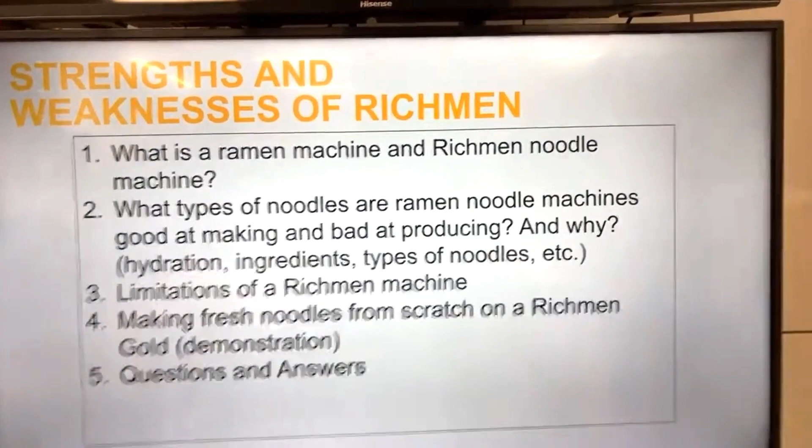So let's get started. First of all, I want to talk about what a ramen machine is, and then what a Richmen noodle machine is. For those people who don't know what they are, it's gonna be difficult to understand, so I want to address this question first. And secondly, what types of noodles ramen noodle machines are good at making and bad at producing, and why. We're going to talk about hydration, ingredients, types of noodle, etc.

And I want to address the limitations of a Richmen machine. There are certain things that Richmen machines are not good at doing, so I want to talk about that. Anyway, we're gonna go into the demonstration of the Richmen Gold machine, and Megumi is gonna make some fresh noodles from scratch.

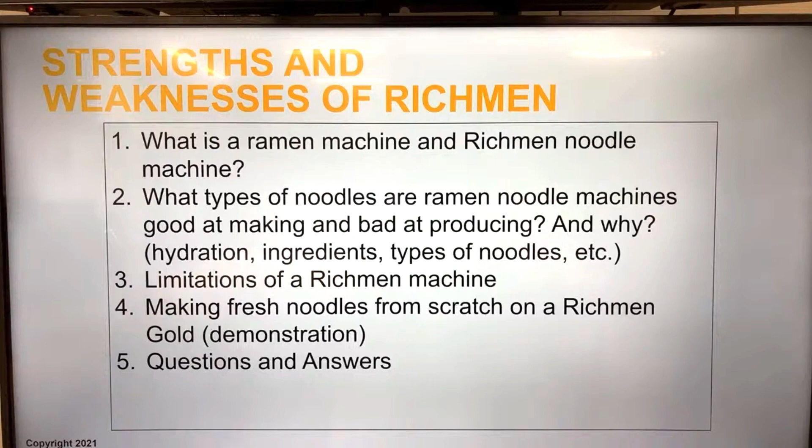What are ramen noodle machines for restaurants? What is a Richmen machine? There are many noodle machines out there, including noodle machines on a bigger scale. For example, some noodle machines produce tens of thousands of portions of noodles in an hour or so for chains of restaurants, for retail like supermarkets, and for instant noodles. These are really big large production machines. But in this class, we're just gonna focus on the Richmen machine, which is designed for restaurants and small production.

So first of all, usually ramen noodle machines for restaurants and small production are capable of producing a variety of fresh noodles that are low in hydration. Low in hydration means 25% to 40% to the weight of flour. So 25% hydration means for 1 kilogram of solid ingredients, which is usually flour, 250 grams of water or liquid is mixed into it.

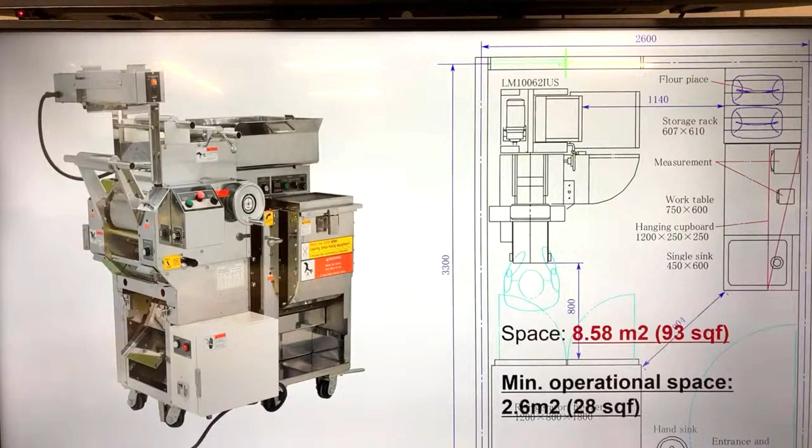So then that's not precise, right? But if both sides are 1 millimeter all the time, that's what precision is, and the Richmen machine delivers that. And space savings: the Richmen Type One machine, for example, is designed to save space. It doesn't take much space. For example, in this layout plan, it only takes up 2.6 square meters of operational space. So it's designed to fit into the small kitchen of a restaurant.

So for you to understand what each of the processes is, let's just go through each process briefly. In the mixing process, we mix liquid ingredients, that's water and concentrate and other liquid ingredients, like raw eggs, for example, and solid ingredients, right? Solid ingredients being wheat flour, other types of flours, for gluten-free types maybe rice flours. So solid ingredients and liquid ingredients are mixed together in the mixer, right?

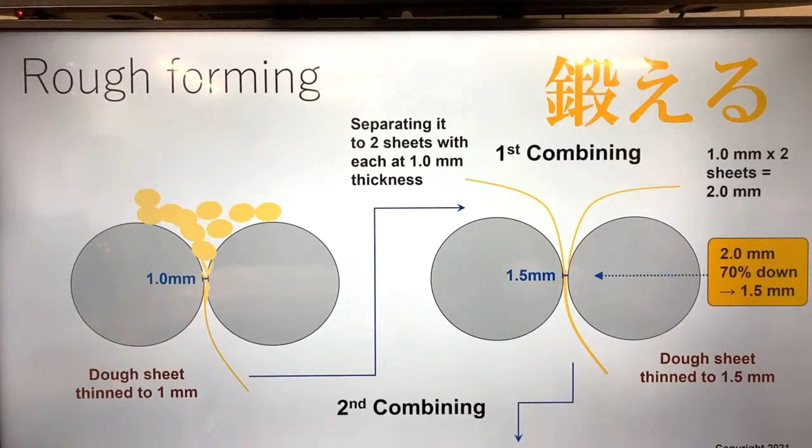We want to make it stronger, and to do that we need to separate this single sheet into two separate sheets, right? And then compound them through the roller. We call this process first combining, right? And then we repeat this process one more time. We call it second combining.

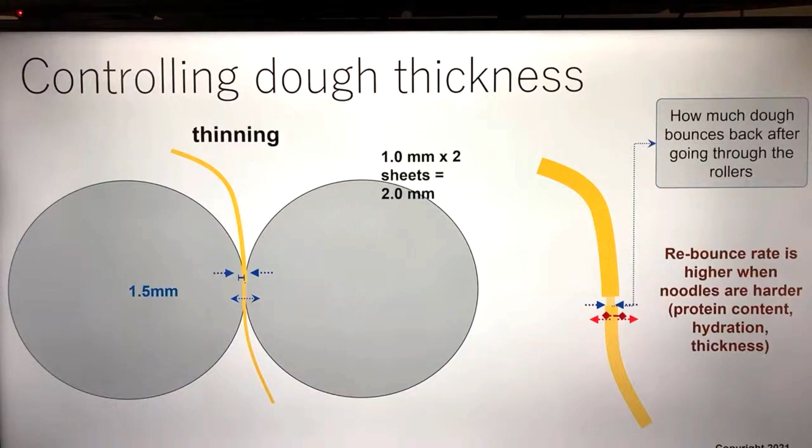After that, the gluten structure of the dough is complete at that point, so all we do is thin it to the final thickness. We gradually thin it to keep the gluten structure inside the dough intact, without damaging it. So we gradually thin it, and then we finally cut it into noodles, right? Using this kind of cutter, we call it a slitter cutter.

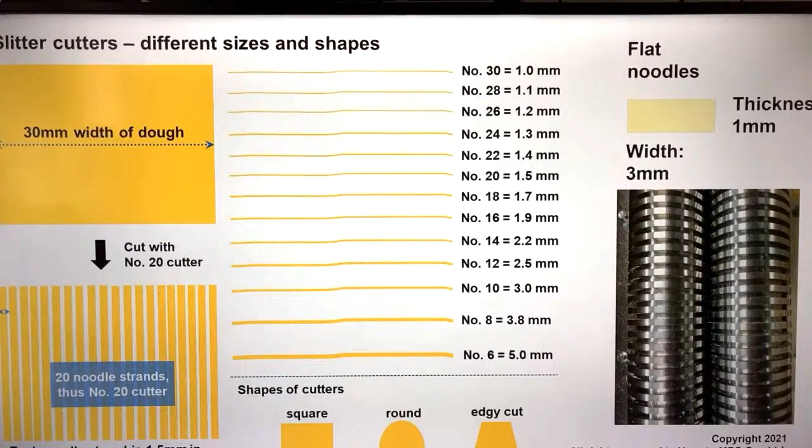And so the thickness of the dough, the thickness of the noodles, is determined by the thinning rollers, the roller gap. But the width of the noodles is fixed by the cutter size that we use. Ramen noodle machines or Richmen machines usually use this kind of slitter cutter, and they come in different sizes and different shapes like square, round, edgy, depending on the kind of texture you're looking for and the kind of noodles you're trying to make.

So we can make them square, like rectangle, using the square cutter. And we can make them round, for example, for pasta, spaghetti-type noodles.

And we can make it edgy to have a sharper surface, to have a certain texture, and reverse cut for noodles like ramen noodles. We actually did a class previously on this type of ramen noodles, and we can make them curly, right? Some people like curly noodles, and we can even control how curly we make the noodles.

So we use elastic silicone plates, and we put them in the back of the cutter, and the noodles coming out get stuck between these plates, and they get squeezed out eventually, and in the process they get curly.

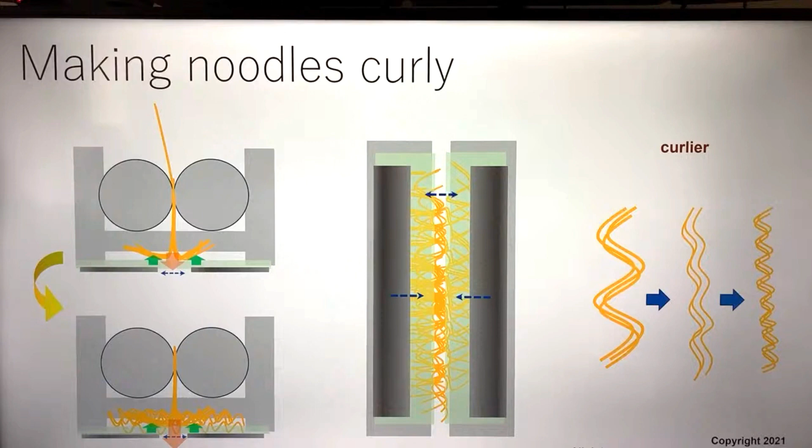And so we can make basically any kind of noodles with the Richmen machine and the ramen machine. But we need to think about these variables, which we already talked about in the previous classes. These variables determine the noodle texture, which is actually the deliciousness of noodles: protein content of flour, and the viscosity, which means how elastic the noodle is, you could say chewiness, and then hydration.

Less hydration ratio is harder, more hydration is softer, and of course noodle size. The smaller, the less bite, which means it's softer, and the bigger the size, the more bite, harder. And how it's served: if noodles are served cold, the noodle texture gets tighter, on the harder side. If it's served hot or warm, the noodle texture tends to be softer.

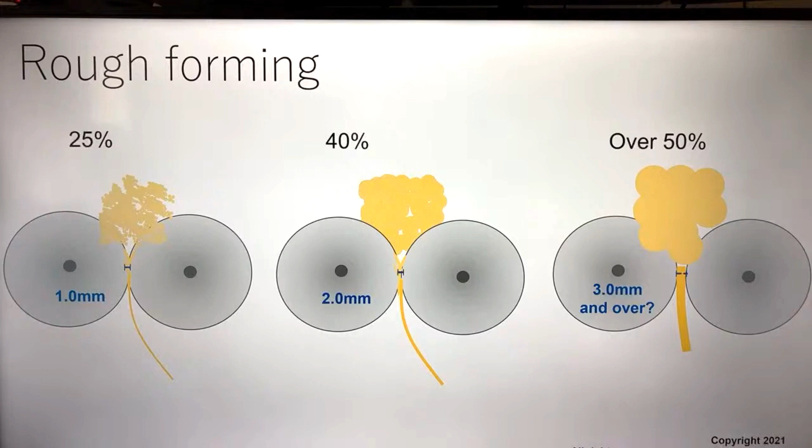And Hakata tonkotsu noodles, at 25% hydration ratio, usually have a thickness of 0.9 to 1.1, and the width is typically 1.1 to 1.3 millimeters, so that's really thin. And the hydration ratio is 25, maybe 28%. So it's very low, so it's a hard noodle and a thin noodle.

And shoyu and shio ramen, the typical standard ramen noodles, usually have a thickness of 1.3 and width of 1.5, and the hydration ratio is usually 30% to 33 or 34. And dipping noodles typically have a thickness of 2.1, width of 2.5, and hydration of 40%. So they're relatively soft noodles.

So when we're talking about udon noodles, there are many types of udon noodles, and here I'm talking about Sanuki udon noodles. We did a class on Sanuki udon noodles previously, so for more information, please check our previous class on my YouTube channel.

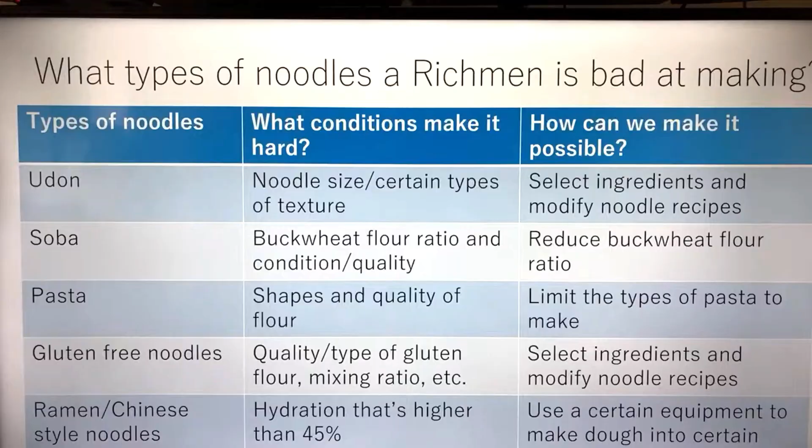So if we want to make good udon noodles with a good texture on a Richmen machine, there are certain conditions. We can make udon noodles at a lower hydration ratio, and we can limit the noodle size to a small size, which corresponds to a lower hydration ratio. Again, the less the hydration ratio, the smaller the noodle size we should make, to balance the noodle texture.

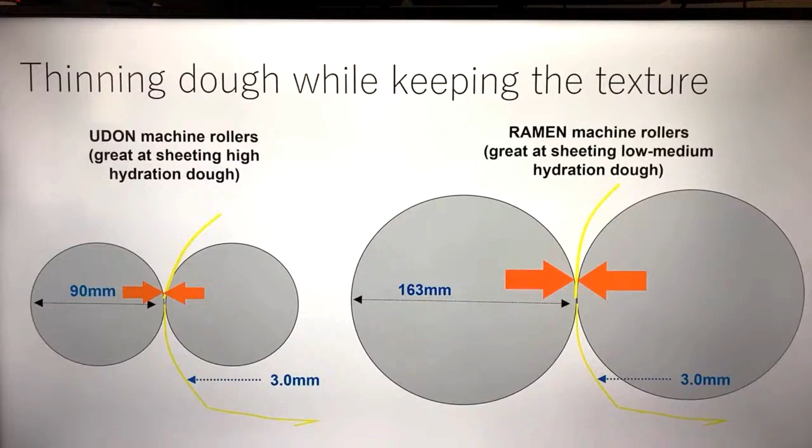So that's why it's difficult for udon machines to be able to process noodles such as Hakata tonkotsu noodles, thin 25% hydration ratio noodles, because it doesn't give it enough pressure. So again, when we're talking about udon noodles, we should limit the noodle size and the corresponding hydration ratio.

And the type of pasta that Richmen machines are good at making would be any strand-shaped pasta, like spaghetti, fettuccine, linguine, pappardelle, that kind of wide strand-type pasta, and certain types of sheet-shaped pasta, like lasagna, which is very easy for Richmen machines to make.

And some people are looking for making filled pasta like ravioli or tortellini. Well, of course the Richmen machine can make the sheet, just the skin of them, because the Richmen machine can make gyoza skin, dumpling skins, wonton skin. So it's possible. It's just a matter of what ingredients you use.

It's possible, but some of the Italian pasta machines out there are capable of doing the wrapping of them as well. That's the function that the Richmen machine lacks, right? So if you're looking to make only this type of pasta, like ravioli, tortellini, or other types of pasta, then you have a better choice, an alternative, than the Richmen machine.

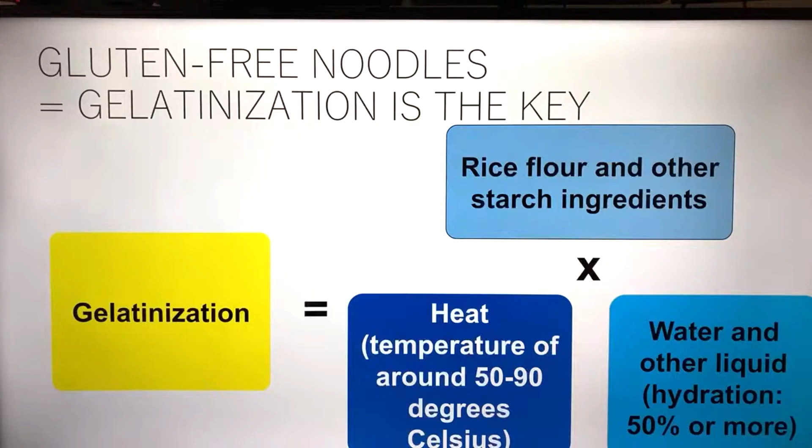And soba noodles could be gluten-free if we're doing a 100% buckwheat flour mix, because buckwheat doesn't have any gluten, right? So there's some difficulty in the production process; making them is kind of cumbersome.

So that's how you can make soba noodles, which are actually pretty good, even if buckwheat is 50% and the wheat flour 50%, right? 50-50. The kind of soba noodles we can make with Richmen machines are actually very good, but they're not gluten free, right? So again, if your main business is soba noodles, and if you want to make soba noodles that are gluten free, then the Richmen machine may not be for you.

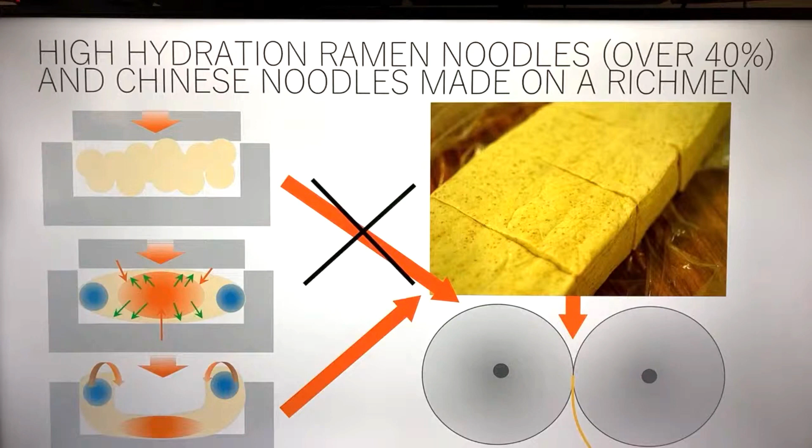So we use this kind of press machine that's used in the udon machine, and we basically press this crumbly dough into a chunk of dough, and then we go through this process of folding it and pressing it, folding and pressing it, to develop the gluten structure inside the dough. So the dough becomes like this, lower in the picture, kind of blocks, right? If we can make them into a block shape like this, it'll be possible for us to further process it into single sheet dough, and then the rest of the process is the same as we talked about in the beginning of this lecture.

Okay, and I want to talk about other limitations that Richmen machines have. So, types of noodles they can make, right? We talked about them, and what I want to say at this point is that we want to ask ourselves what kind of business is our main business, right? Is it ramen noodles, or soba noodles, or gluten free, right? Like, oh, I'm gonna specialize in serving gluten free noodles. Then the Richmen machine may not be for you.

Of course, we're still working hard to find ways to engineer ways to produce better gluten-free noodles with more efficiency. But first of all, they are not initially designed to produce gluten-free noodles. So if your main business is gluten-free noodles, then they may not be for you.

So, automated production process. We get asked this question a lot. Are the Richmen machines automatic, are all the processes automatic? No, they're not. As you can see later in the demo, some of the process is manual. For example, we had to feed the dough into the roller in the first rough forming process, and we move the dough around, roll up the dough from point A to point B, and help the dough sheet feed into the roller and so on.

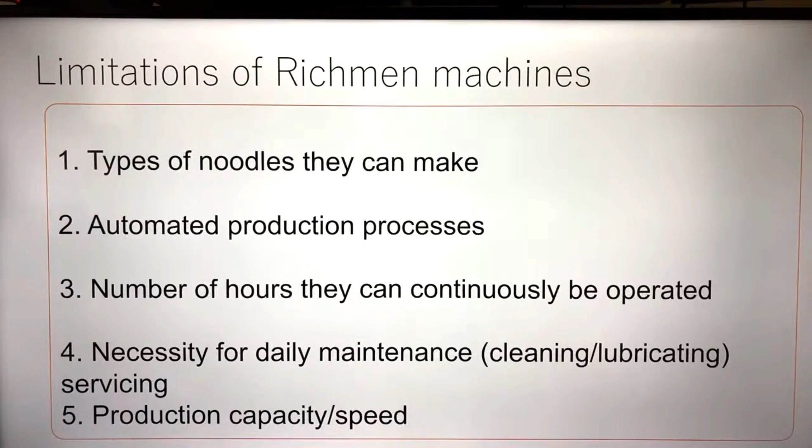And lastly, production capacity and speed. We have bigger options, but I'm just going to talk about these four options and Richmen One. Production speed is up to 100 servings an hour, equivalent to 12.5 to 13 kilograms of fresh noodles. Again, we want to limit the daily continuous operation time to 6 to 8 hours, so we usually say you can make 500 servings a day. Option B is Richmen Gold, which is a bit faster: up to a maximum of 150 servings an hour, so we say 700 a day max.

Pattern C is Richmen 2 with a separate 25 kilogram mixer, and the noodle machine Richmen 2 can pump out almost double the amount of Richmen 1, so we say a thousand a day. Pattern D is the 25 kilogram mixer and 2 units of Richmen 2, and that's 2,000 a day. And of course we have bigger options, but again, Richmen machines are designed for restaurants and small production.

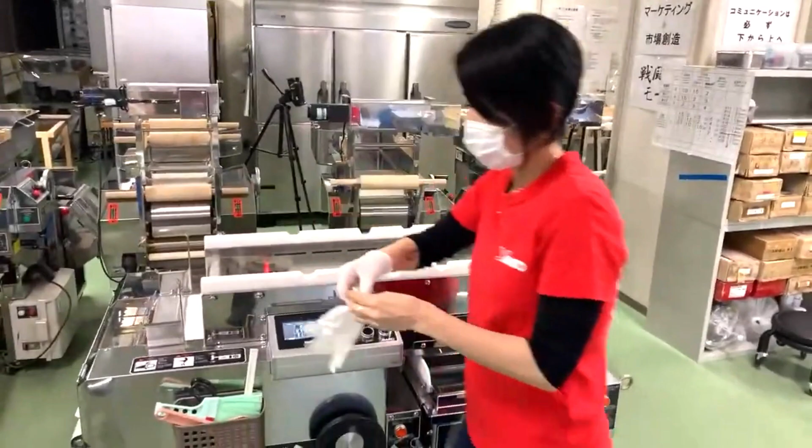So this is a Richmen Gold machine, and it's a fairly new machine that we started shipping a few years ago, like 2 to 3 years ago. It has the 10 kilogram mixer, and it has a lot of functions that we don't see on Richmen 1 or Richmen 2 machines. But it's basically a Richmen machine.

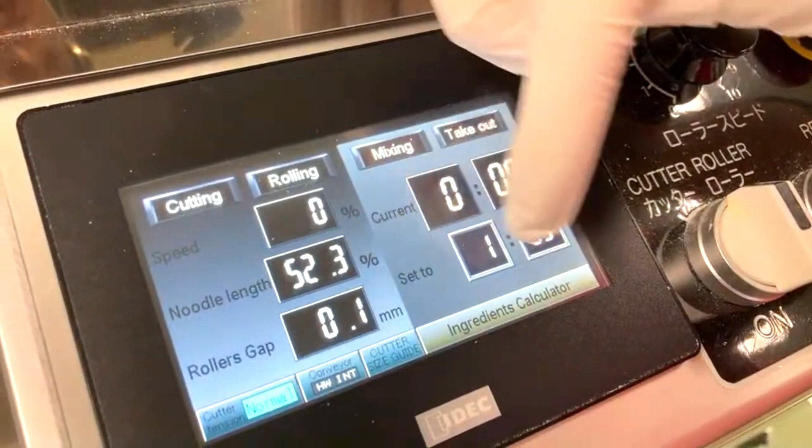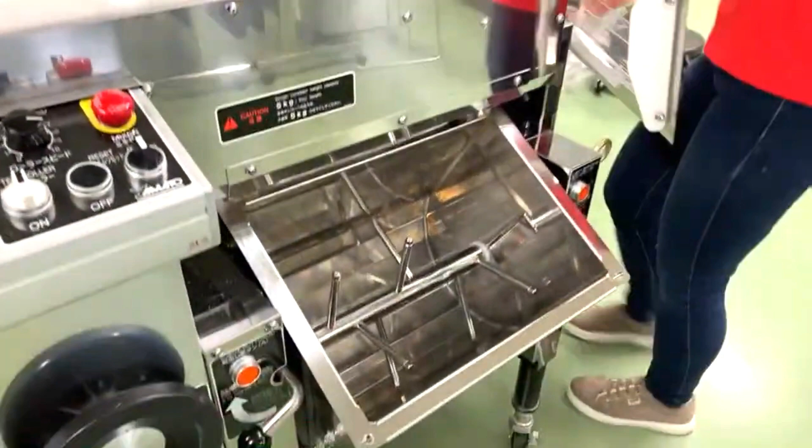We wanted to show you the types of noodles this machine is not designed to make. So today we are making udon noodles on the Richmen machine. You set the timer for the mixer here on the touch panel, and again this is a 10 kilogram mixer, so you can put up to 10 kilograms of flour, but the minimum batch is 4 kilograms of flour.

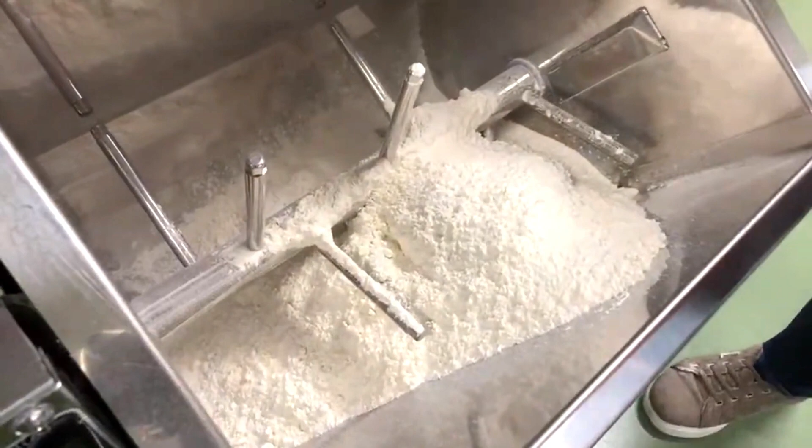What she's making now is salt water. Udon noodles use a lot of salt, right? And if you want to know more about how to make authentic udon noodles, you can watch our previous class on udon noodles. Because we use a lot of salt, some of the salt doesn't melt with one round of stirring.

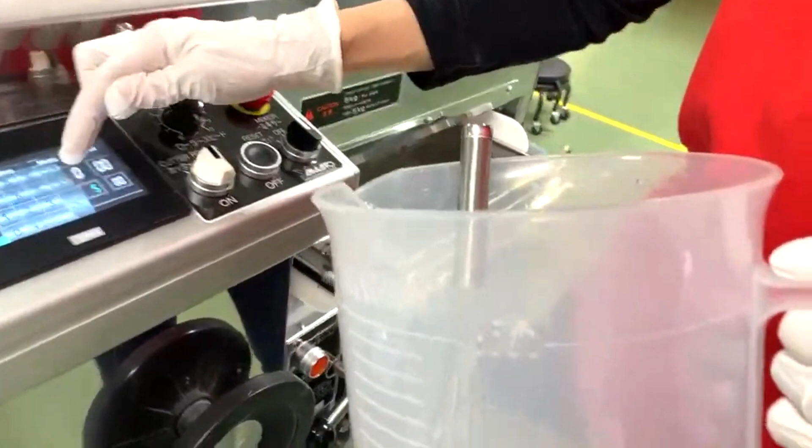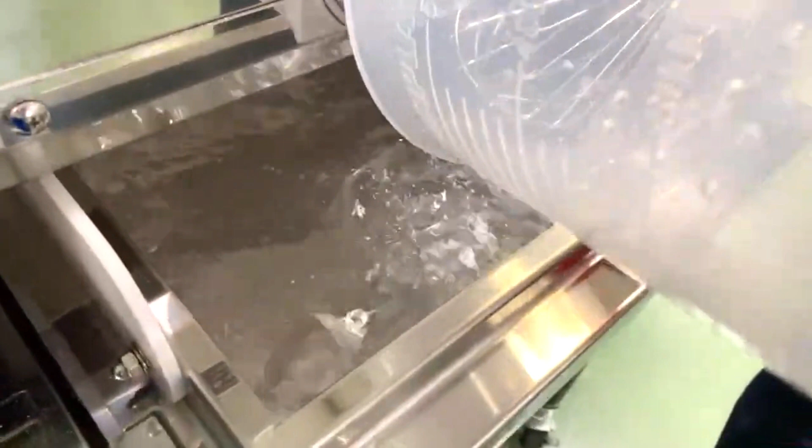So we want to pour the water back and forth between bowls. Another thing she's putting in is vinegar; you can use rice vinegar or a type of grain vinegar as well. Because this is a high hydration ratio noodle, we are trying to go to the limit of this machine. This is 42%, which is a bit beyond the higher range of hydration ratio for this machine.

But depending on the type of flour we use and maybe the temperature of the water, we could go up to 45%. So the temperature of the water matters, and the protein content of the flour matters for how easy it is to process on the rough forming process. Remember, you are trying to make a single sheet of dough from this dough, right? That's what gets tricky and makes this noodle making process difficult.

So again, the larger the chunks of dough, the harder it is. It's more cumbersome, because it's softer and it gets stickier, and it's bigger, so it's hard to feed them into the set of rollers and turn it into a single sheet of dough.

And this mixer is rotating the mixer blades at 75 rotations per minute, which is an ideal mixing speed for noodles, ramen noodles definitely. So it mixes the flour, the solid ingredients, and the liquid ingredients to an ideal condition.

And actually we tested different hydration ratios. We tried to make 50% hydration ratio udon noodles on this Richmen Gold machine, but it was almost impossible to turn that high hydration ratio dough into a single sheet of dough, because the chunks were too big, and the dough was so soft and sticky.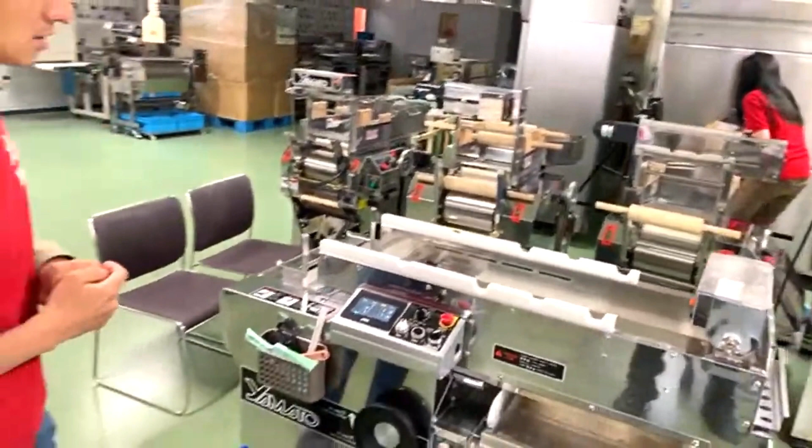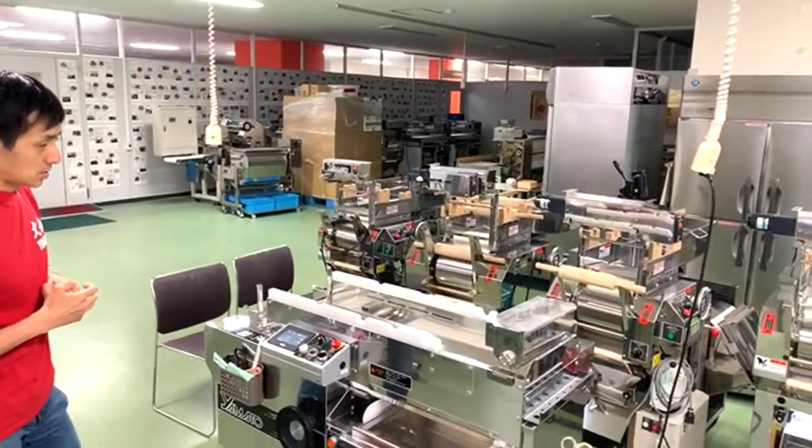She said it was almost impossible to do 58% hydration ratio, plus the protein content of the flour is lower, which makes the dough even softer than if you make it with ramen flour, which has a protein content of 11 or 12% and a lot harder noodle texture. That's why the rough forming process was hard at 58% hydration ratio. Exactly the same recipe, the same flour, the same ingredients, but just 8% higher hydration ratio makes it almost impossible to work on this machine.

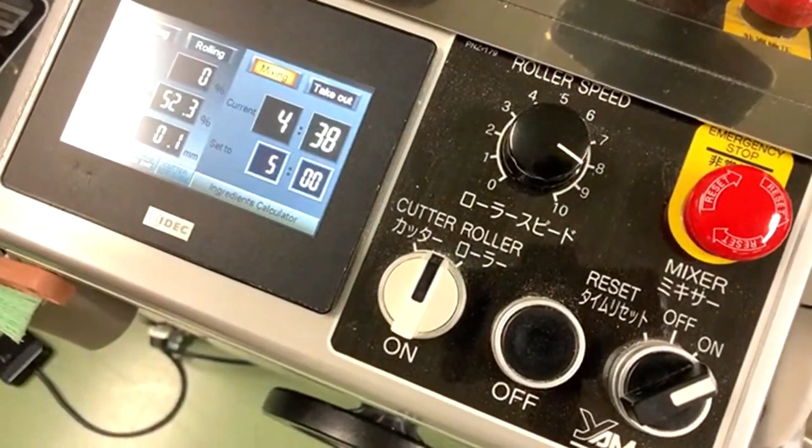So hydration ratio is very important, and even a 1% or 2% hydration ratio difference makes a big difference in noodle texture and softness, even if you're using exactly the same wheat flour and exactly the same ingredients.

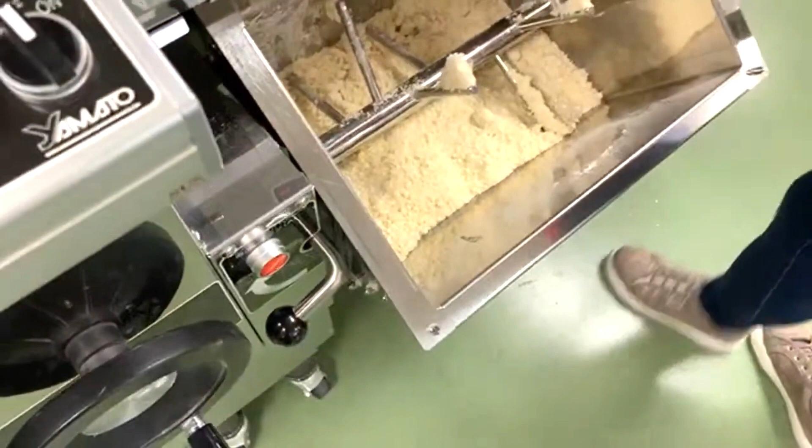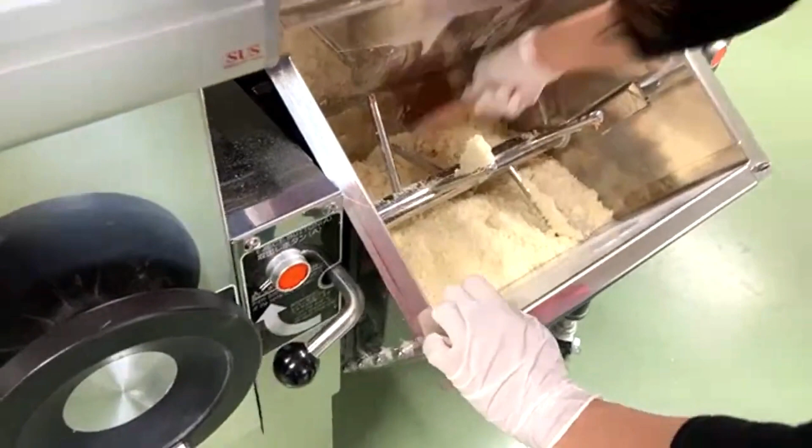So the mixing is almost over, and you can reverse rotate the mixer blades to make it easier to take off the dough stuck on the blades, and we're gonna take it out

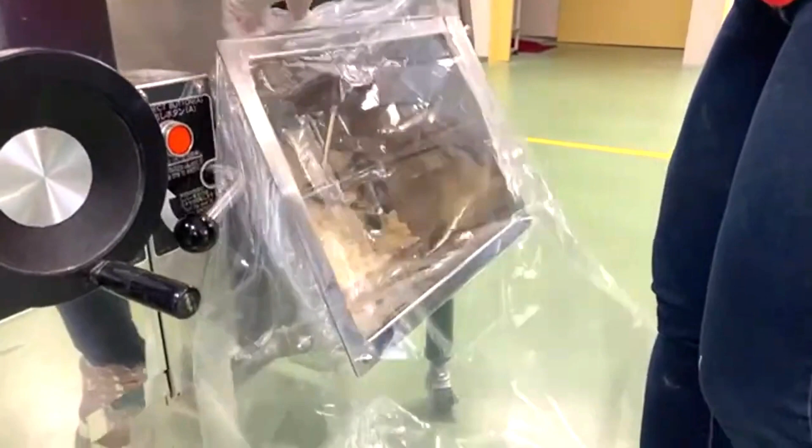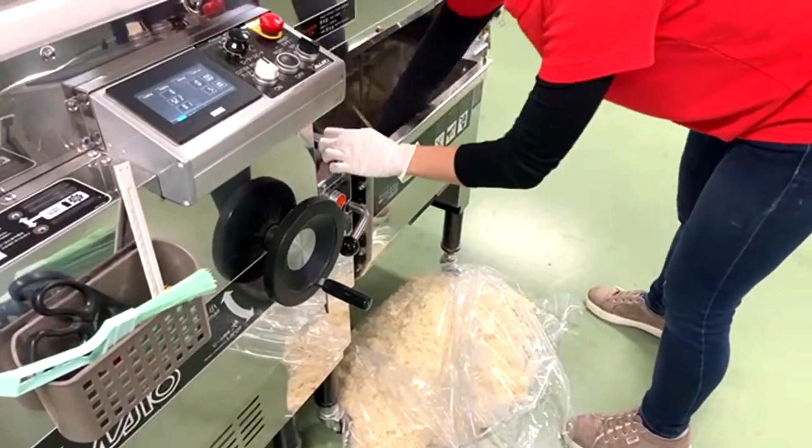on the plastic bag. The reason we take the dough out in the plastic bag is that we usually go into the first resting process after the mixing process. We usually let the dough sit for 30 minutes to an hour, but we don't have that much time, so we'll just skip it for the sake of this demo and go into the rough forming part.

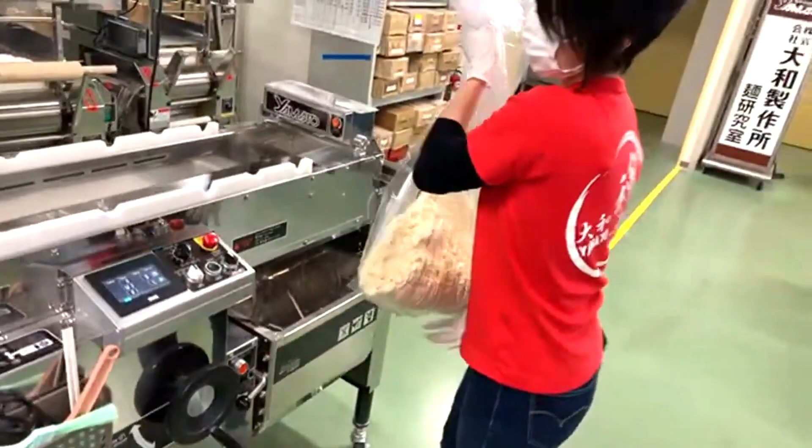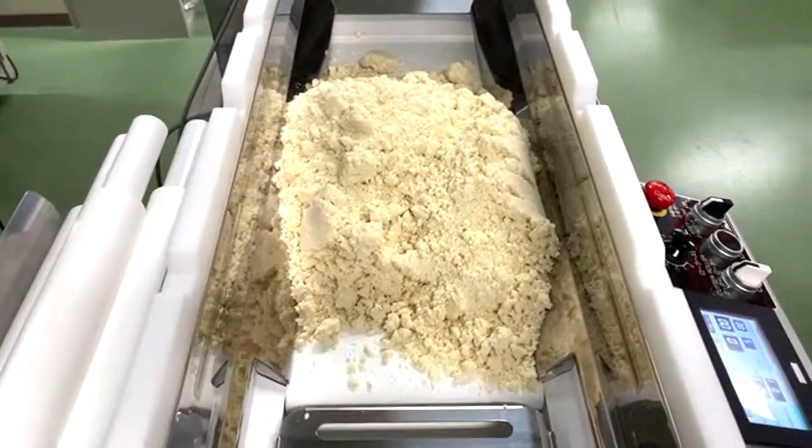So another feature that this Richmen Gold machine has is this automatic feeding function. You don't have to feed the dough to the roller by hand. It does it for you, because it has sensors to detect how much of the dough is going to the roller. See the red light pointing at around the entrance to the roller? That's dictating how much dough is being fed to the roller.

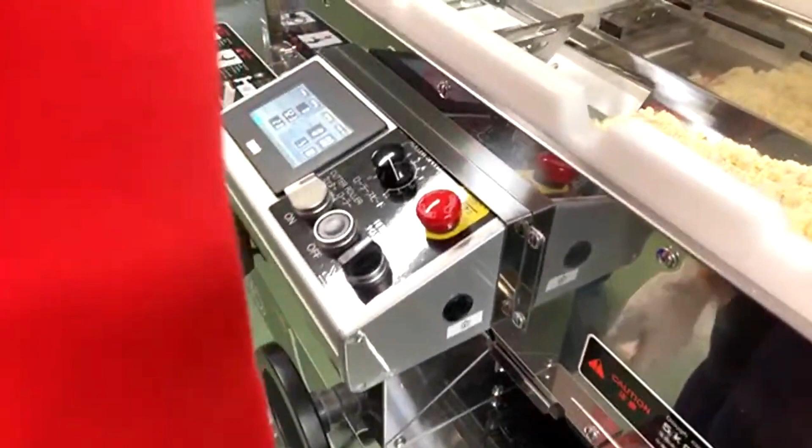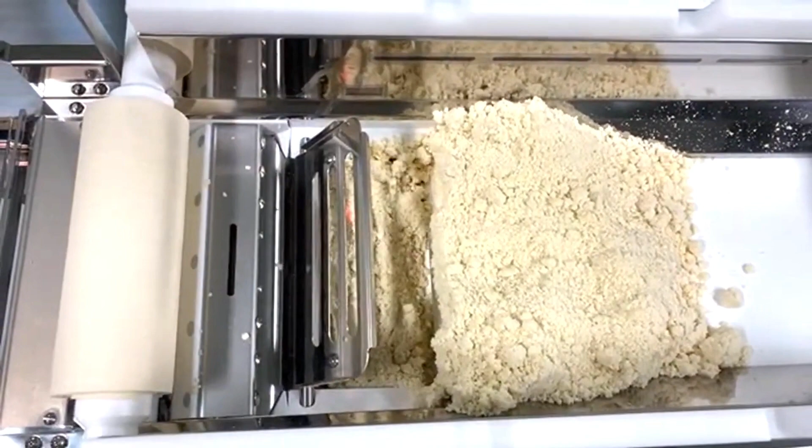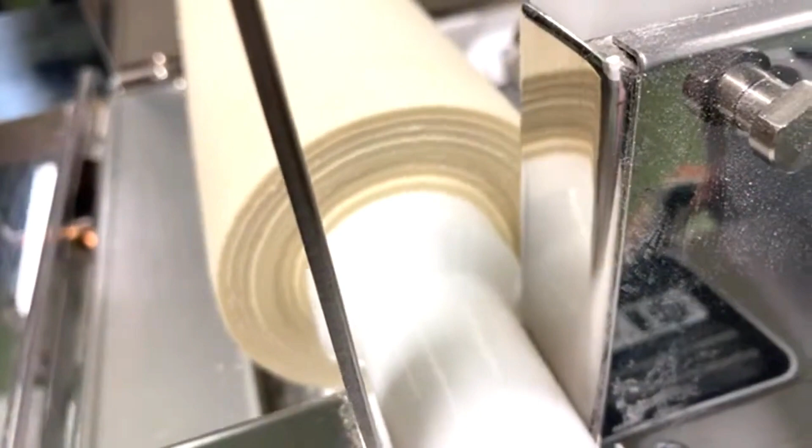And if the dough is too little, this machine moves the feeding conveyor forward to move more dough to the feeding. So it does it automatically, so you don't have to do it manually. Because if you do it manually, it takes a bit of experience and practice, depending on the hydration of the dough you're working with. But this machine just does it automatically.

So there's nothing we're doing right now. Like my Mimi is just standing around, watching the dough going to the roller. But of course, you can do other things while Richmen Gold does its job. And so this part is automated.

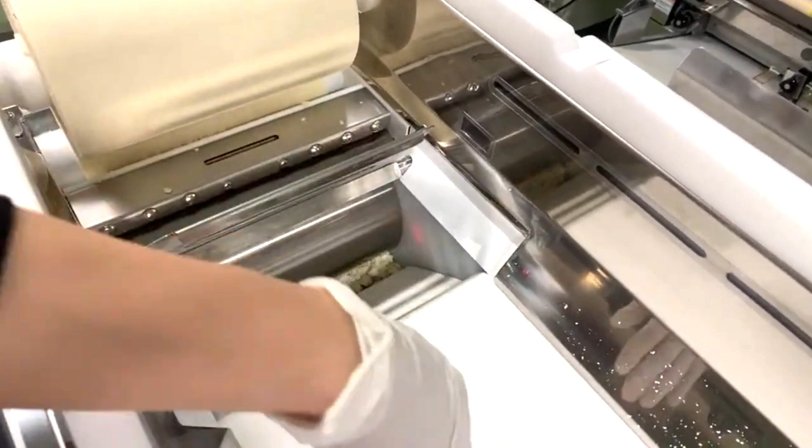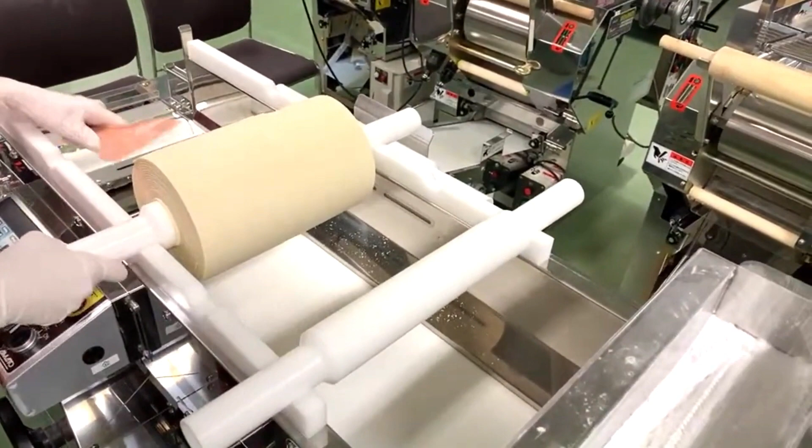So this process, the rough forming, is the part where it gets difficult. And now she put her hand through the sensor. There's actually an invisible sensor beaming between these rails, and if you put your hand in there, the machine stops, so that your hand wouldn't get caught in the rollers.

And so we talked about this combining process. Basically separating this single sheet of dough into two separate sheets, and then combining these two sheets through the roller. Because that was a 2 millimeter initial roller gap in the rough forming, we're compounding these 2 millimeter sheets of dough into one. So the dough sheet that's equivalent of 4 millimeter thickness is going through

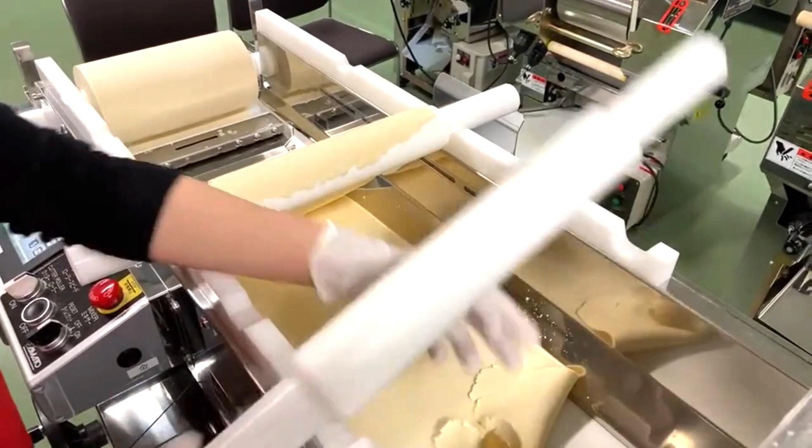the roller. But we can't just leave the roller gap at 2 millimeters; that would be too tight, too much pressure, and would damage the gluten structure inside the dough. So we apply the 30% reduction rule: we subtract 30% of the current thickness to determine the roller gap. 4 millimeter times 0.3 is 1.2 millimeter, subtract that from 4 and we get 2.8. But to make it simple, we just set the roller gap to 3.0 millimeter.

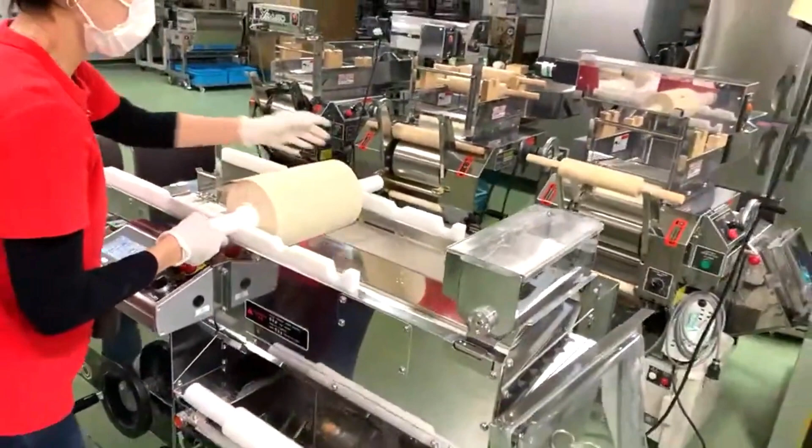So the combining process basically strengthens the dough, helps develop the gluten structure inside, and makes the dough stronger. We normally want to repeat the combining process twice, depending on the type of noodle you're making.

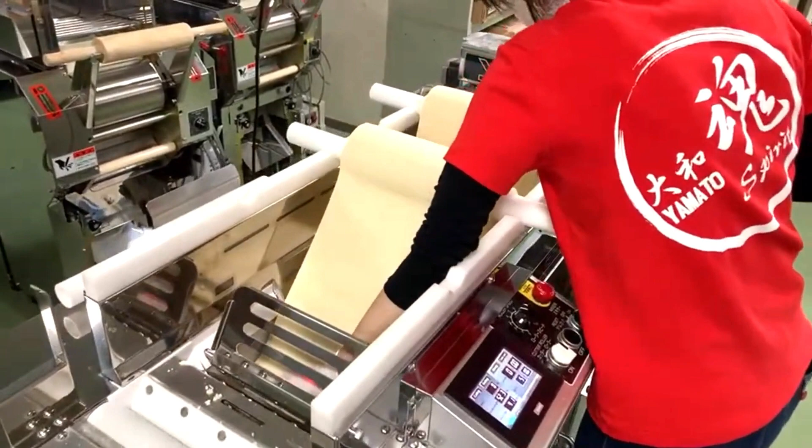After the combining process, we want the dough to be stuck together, because we are combining them. But after this process, especially with this high hydration ratio noodle, it tends to stick together. It's very sticky because it's wet.

So we want to dust it. We start the dusting process to keep them from sticking. This machine has an automatic duster in the rear position, doing the dusting on that combined sheet of dough.

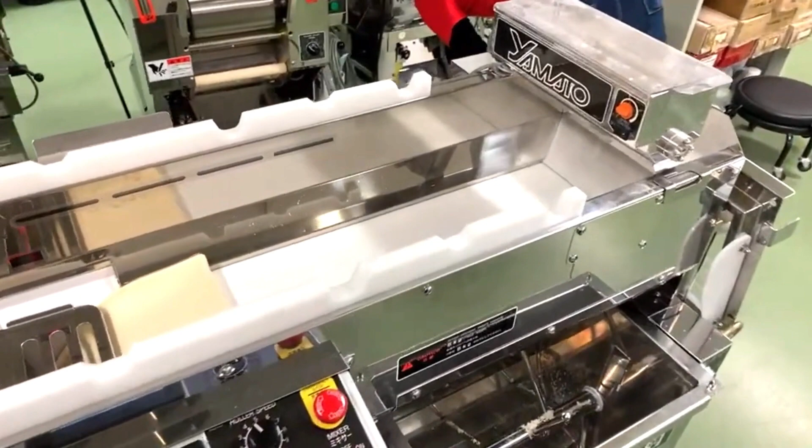So udon noodles are being made on the ramen machine, and so actually again, if you limit the noodle size and adjust the hydration ratio according to that noodle size, which means that we need to reduce the hydration ratio from the usual hydration ratio of udon noodles, then we can make pretty good udon noodles, and I'm sure these udon noodles are very,

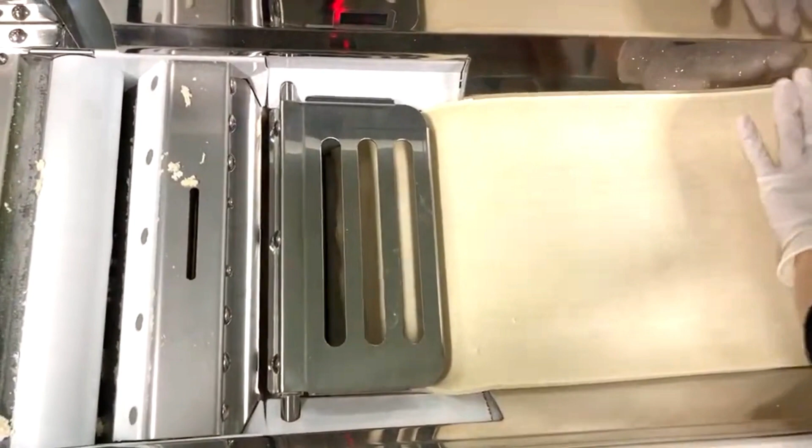very good. So after the second combining process, we're just gonna thin it. You're just gonna thin it, right? Just gonna thin it to the final thickness that we want to have when this dough is cut into noodle strands. So again, the roller gap determines the thickness of the dough, the cross section of the noodle. The thickness of dough is determined by the roller gap, and width is determined by the groove of the slitter cutter.

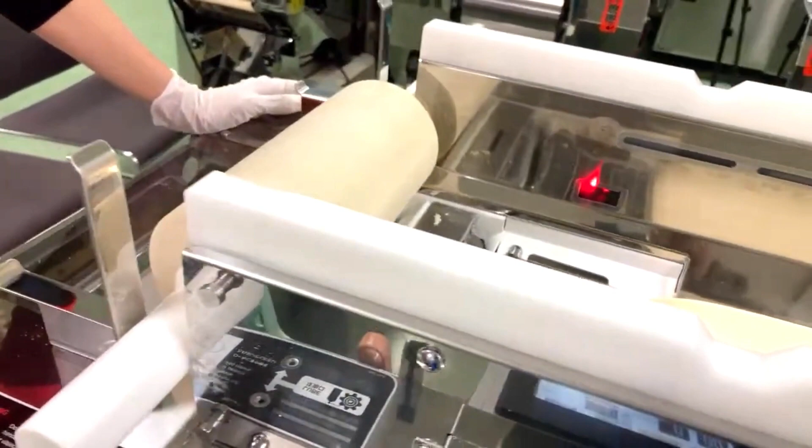So again, applying the 30% reduction rule. Right now it's being thinned at a roller gap of 3 mm. The previous roller gap was 4, and she just stepped on the foot switch, and while you're stepping on it, we can hold the operation. We can pause the operation. So that comes in really handy when you panic, when you can't react fast enough, then you can just step on it and stop the operation temporarily.

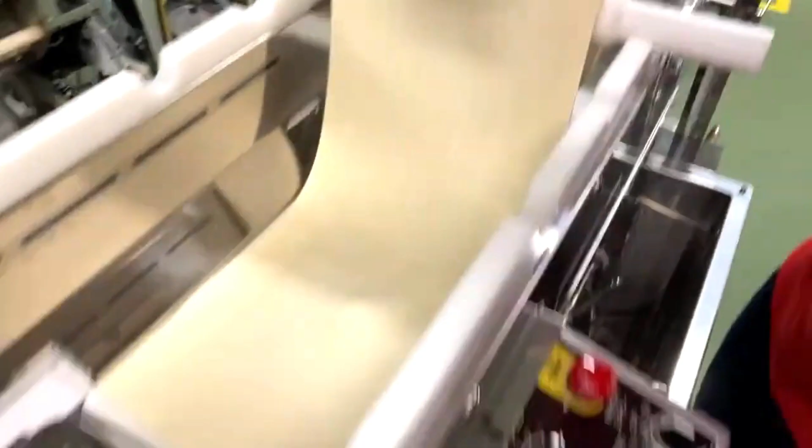And so that was 3 mm, it's gone through, and the actual thickness is 3.5 mm, so there's a difference of 0.5 mm, and actual thickness is always bigger, because it's dough and it bounces back. So this difference is very important for us to be able to calculate the final roller gap we need to set to get the final actual thickness of noodles. And so we can expect this dough to bounce back by 0.5.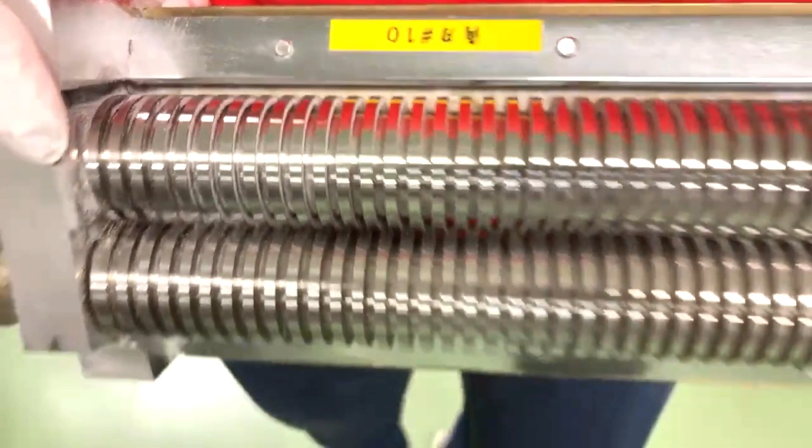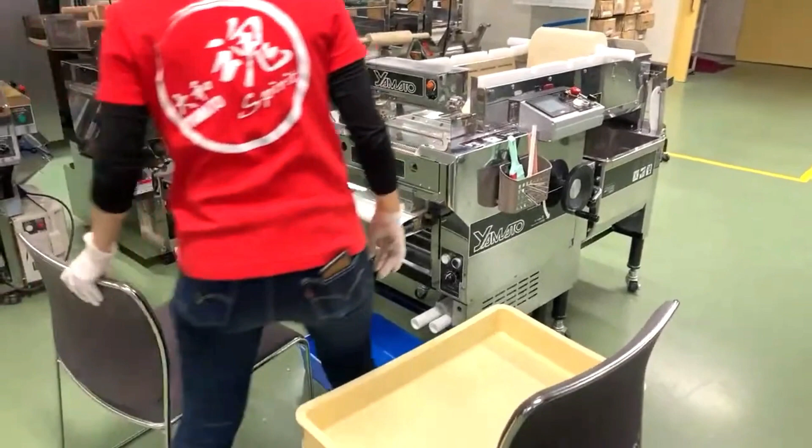And so we set the roller gap to that point. So this is the cutter that we are talking about, the slitter cutter, and it's number 10. That means the width of each noodle will be 3 mm, and so she set the roller gap to 2.1, and after 2.1 mm, we expect the thickness to bounce back 0.5, right? So final thickness we expect to be 2.6, 2.1 plus 0.5, and the width is fixed, 3 millimeters. So the size of this udon noodle will be thickness 2.6 and width 3.0. So we're gonna start cutting it.

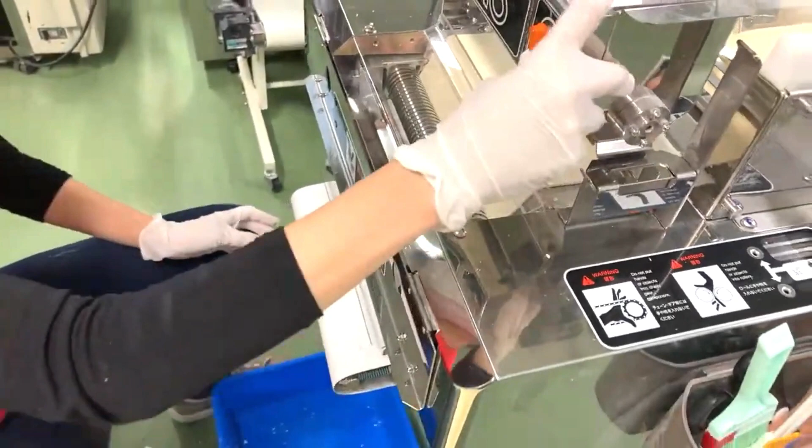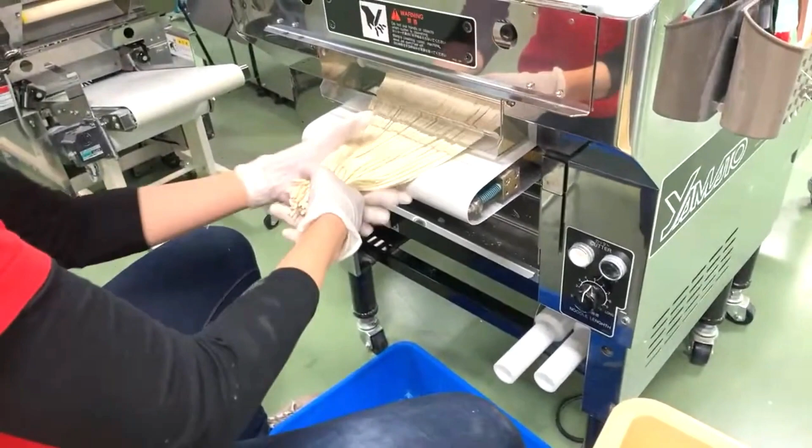So as you can see, the point where she's catching noodles is relatively high, about 60 centimeters from the floor. And so if you want to showcase the Richmen Gold in a restaurant or something, it's a good piece of equipment to have, because you can show the highlight of noodle making, catching the noodles that are coming out of the machine, and it's more visible. It's higher in position.

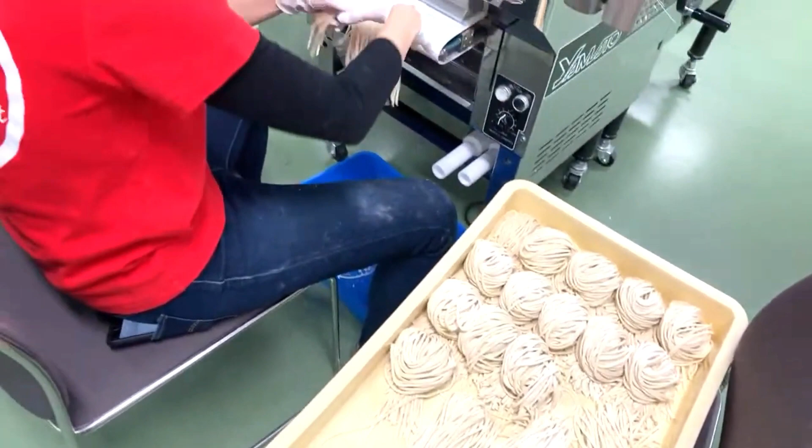And you can of course adjust the serving size by changing the length of the noodles. It's very easy, just a touch of a knob. The longer the noodles, the bigger the serving size; the shorter, the smaller the serving size. And you can see a really long one, and you can see a really short one, right? It's very easy, just a touch of the volume. Right, so that's how you can make really good udon noodles on the Richmen Gold machine.

So this is the width, but this is the thickness. That thickness shows kind of a rough surface. That's where the soup gets absorbed from, and so it has a kind of distinctive texture, and then as you eat the noodles, you taste more of the soup.

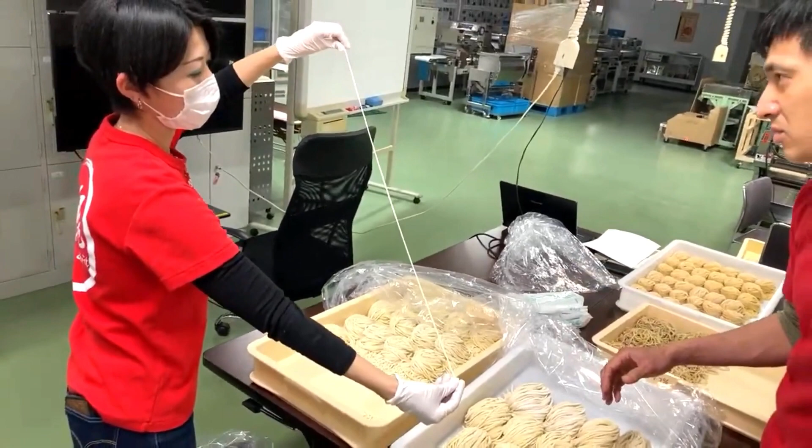It's exactly the same ingredients, right? See how it stretches? How the noodle strand stretches for 42%, but for 50%, see, it stretches further and further. It's softer and more elastic. Just the difference of 8% in hydration ratio. That's the difference.

But still, 42% stretches that much, and it's very elastic, and these are very good udon noodles. So in the lecture I talked more about the limitations of Richmen machines, but these are the kind of things you can do with Richmen machines as well.

Even though Richmen machines are not designed to make these types of noodles, it's possible. If you adjust the recipes and everything, it's feasible, it's easier, and you can make them with efficiency and consistency. So that's commercially viable. Okay, so that was what I had for this class.

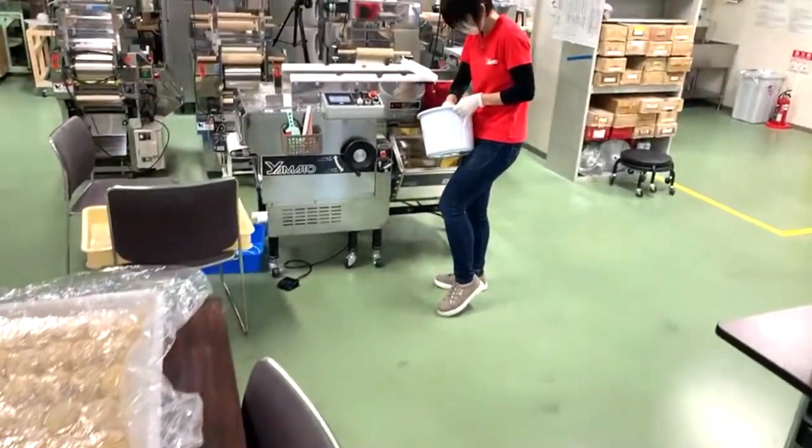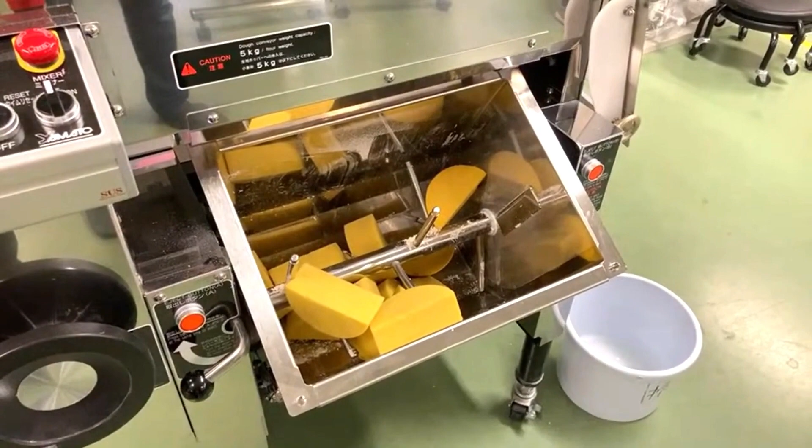And before we go, we'd like to show how we clean the mixer component, which actually gets the dirtiest every time we make noodles. Again, Richmen Gold Richmen machines are electric machines, and as much as we are tempted to use water, there are a lot of electric parts, so they get short circuits easily.

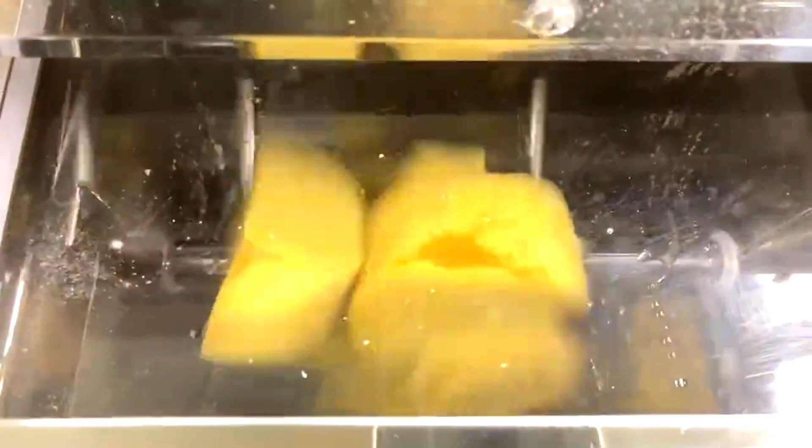So we use sponges. We soak those sponges in water, put them in the mixer, and run the mixer for maybe 10 or 15 minutes, and basically the mixer just cleans by itself. After that, we just wipe the inside with a dry cloth, then spray alcohol to sanitize it and kill off the bacteria, and let it dry. And that's it. So it's very easy.

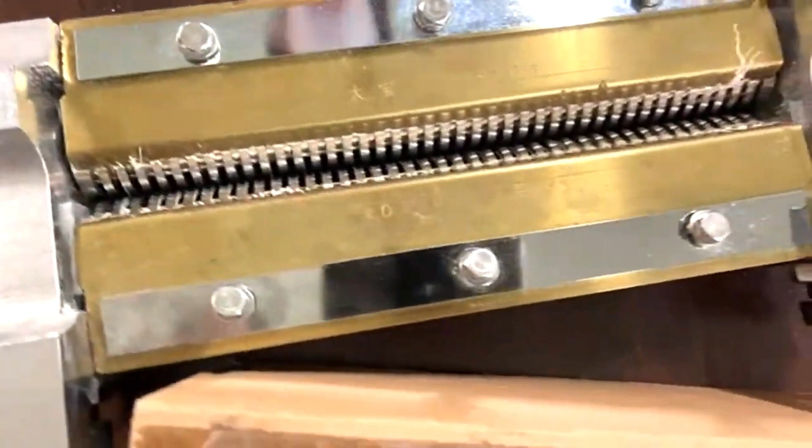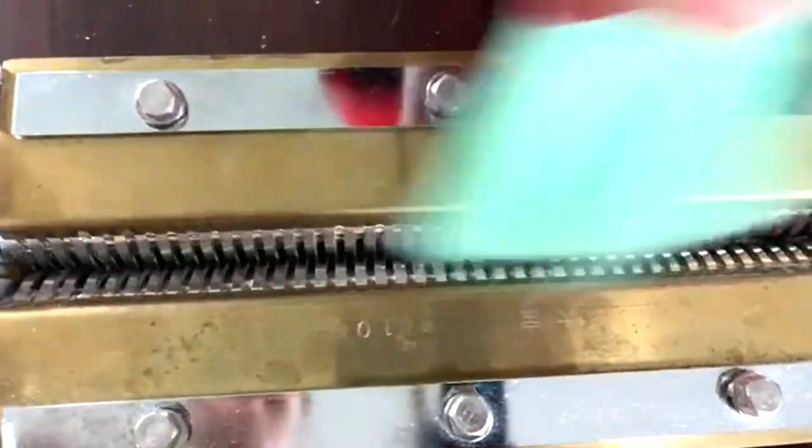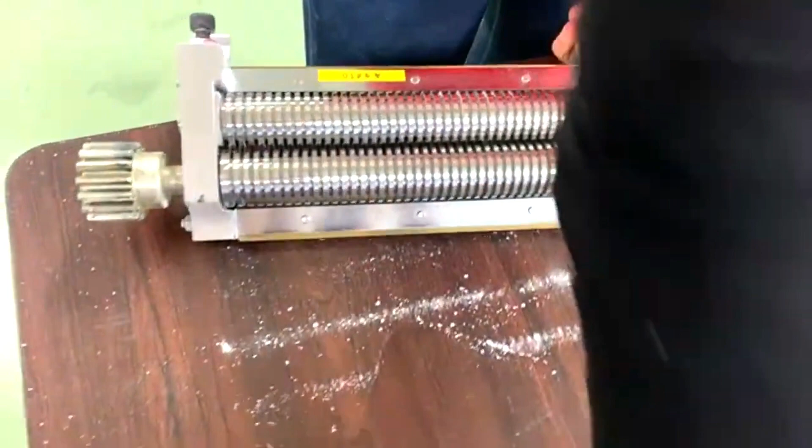And then the cutter has these scrapers on the back. To clean the cutter as a daily routine, we just take this brush and sweep all the dough stuck between the grooves, or the flour, and that's about it. Then just put it back in the box or whatever you have.